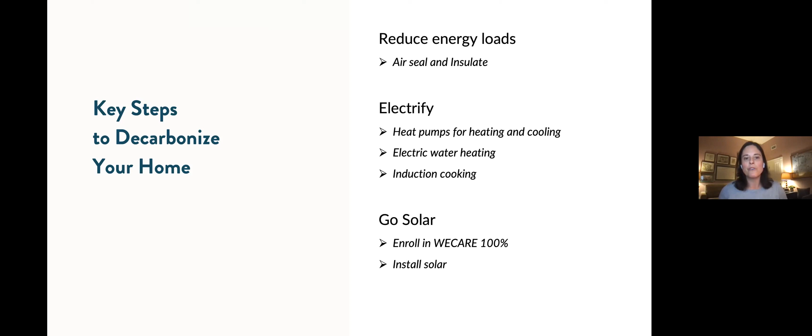That doesn't necessarily need to happen in sequence, particularly if you're signing up for renewable energy through the municipal light plant. So I'd like to move on now to share a couple of case studies that give you a sense of what this decarbonization roadmap might look like in practice.

I'm going to start with a project we did in Newton, a whole house retrofit in 2018. This project, unlike most of our projects and the other two I'll share after this, combined renovation work—design, space planning, reconfiguration—with energy and performance work. But this is a project we call a performance-only project, which focused just on improving the energy and carbon performance of the home.

These clients came to us with the goal of reducing their energy use and carbon emissions as much as they could within reasonable budgetary constraints. So they didn't want to thicken the wall assemblies and add insulation to the outside—their house really wasn't a great candidate for that, and there were budgetary reasons too. So they worked within the existing framing of the house to do as much as they could to improve it and drive down carbon emissions.

One of the owners is an energy policy analyst and wanted to walk the talk. So, fortunately, there was a lot to be done with this house—a lot of improvement that could be made.

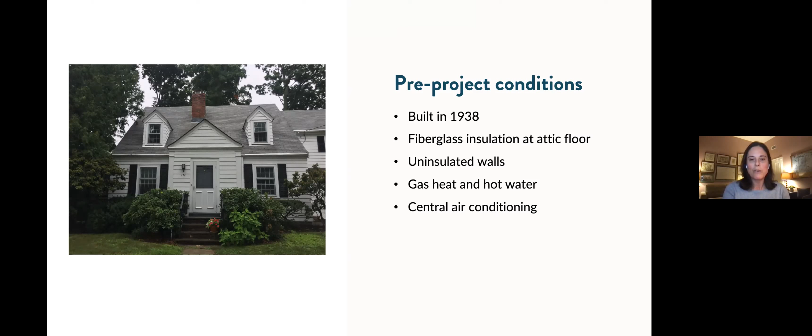The walls were uninsulated, there was no insulation in the basement, and there were modest levels of insulation along the attic floor. There was a relatively old gas system nearing the end of its useful life, so it was time to think about changing it out anyway—which is often one thing I'll say, you want to plan for that in advance of when your equipment dies, so you don't end up installing another gas system just because you're in an emergency situation.

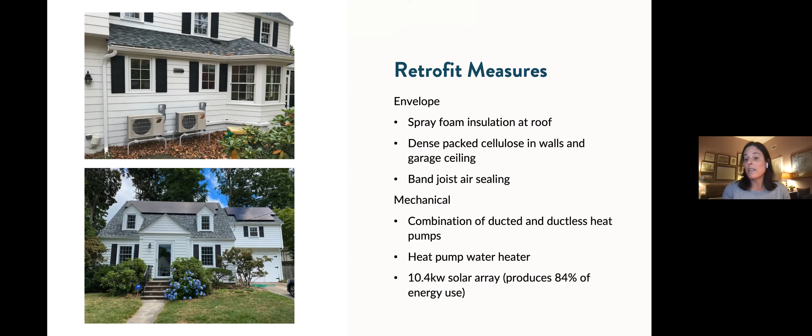So it's good to plan in advance. What we did at this house is comprehensively insulate it within the framing cavities—the underside of the roof, the walls, the garage ceiling, and air sealing around the band joists in the basement. The new mechanicals were a combination of a ducted and ductless heat pump system: ducted in the attic to serve the second floor bedrooms, and ductless on the first floor, with a heat pump water heater. Last but not least, they installed a 10.4 kW solar array, which is producing about 84% of the energy they're using now on an annual basis.

To give you a sense of the impact of this work, it's pretty dramatic—this is on the upper end of what we see with this kind of work. They went from, again, that number of the average house in New England using 125 million BTUs a year—they started off higher than that, and got dramatically lower, a 69% savings, with similarly significant savings on their operating carbon emissions.

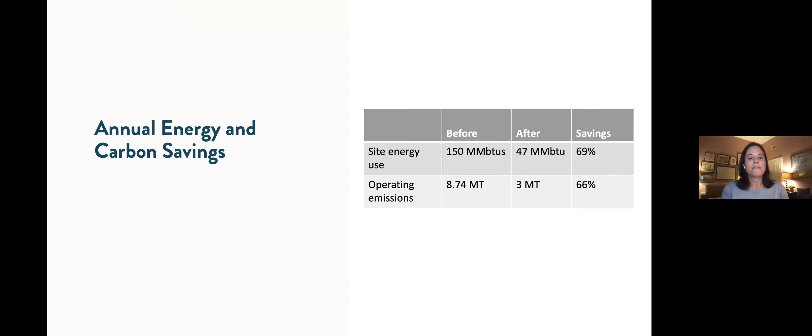The next case study I'd like to share is one of those sort of sweet spot projects for us, a combination of functional improvements, livability improvements, as well as energy performance upgrades. The owners came to us really, it was primarily about making the house livable for them.

This house had been in one of the owner's families since it was built in 1930. It was the owner's grandfather's house, his mother grew up there, and he and his wife inherited it. Very little work had been done since they moved in, so their top priorities were making the house livable, functional, and suitable for their daily lifestyle needs.

The kitchen was awkward and chopped up. There was a very public tiny bathroom plunked into the corner of the kitchen. You can't see in this picture, but they have a really deep, beautiful, private backyard that they were cut off from, with limited access to. So it was primarily about making their lives better, making this house work better for them.

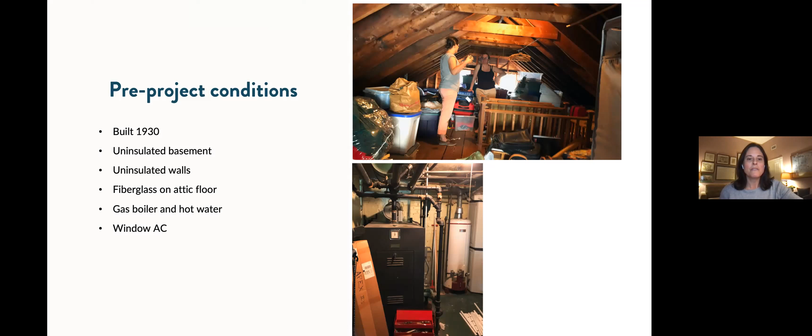So we had a lot to work with, and amenable clients who were happy to put themselves in our hands to help them become more comfortable. Top priority was to give them a bright, airy, open kitchen that connected to the rest of the house and the backyard, and just really worked for their daily needs.

We also took over the back third of the living room, a front-to-back living room, to create a first floor bathroom that would be accessible for their aging parents when they came to visit, and provide overflow use for their family. Before this, they were a family of 4 with 1.5 bathrooms. And then there's this beautiful large back deck with room for a seating area as well as dining.

And then the energy measures. Similar to the last project, we comprehensively insulated the entire shell, eliminated the gas, went over to heat pumps for heating and cooling, as well as a heat pump water heater, and changed over the cooking to induction. Actually, the last remaining gas appliance in the house is the gas dryer, which was fairly new, so they still have a small gas bill every month.

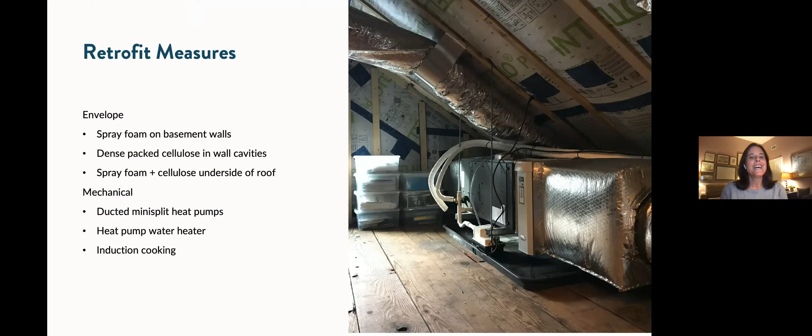But the end result of this work was even more dramatic. I want to emphasize, you'll see in the next case study, that this isn't what we see on every project - this is a home that needed a lot. There are a lot of homes out there that really haven't yet been insulated, with really old equipment. When you encounter those homes, it's possible to achieve really deep energy savings and deep decarbonization, and that's without what we'd think of as super insulating or doing a deep energy retrofit where you're adding insulation to the outside of the walls and on top of the roof.

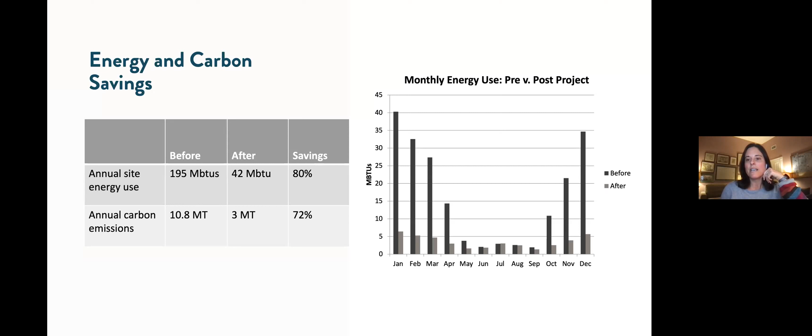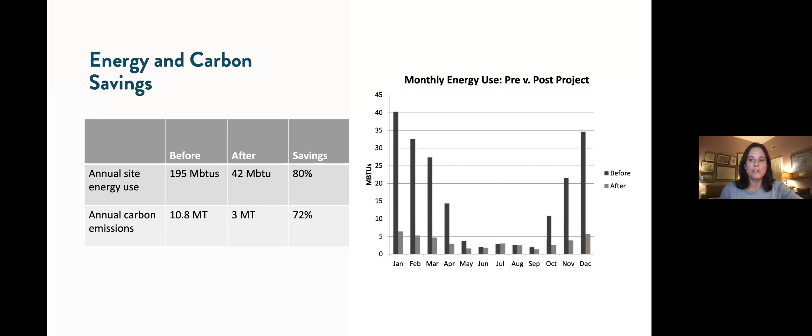You can see the dramatic drops in energy use in the colder months of the year through this combination of comprehensively insulating the building shell and then changing out really old, inefficient equipment for best-in-class heat pumps. All right, final project.

Now you'll get to see what more modest or moderate improvements look like, which is really more typical for our projects than these dramatic savings we're able to achieve. We are very often, when working with existing homes, pushed back against hard in our efforts to achieve deep levels of decarbonization.

If you don't have easy access to the exterior surfaces to insulate them, let's say the house is a brick house and insulating the walls would require dense-packing cellulose from the inside, which is really messy and invasive, and you kind of need to move out of your entire house. You can run into situations like that all the time with existing homes where it's just really hard. And this was one of those cases.

This project, like all of our projects, was interesting. This was another really interesting family. Three generations are living in this home. The owners have 3 school-age children, and both of their parents live with them. The owners have their bedroom on the 3rd floor, their bedroom and bath, and the 2nd floor primary suite. The parents and the 3 kids - I believe they have 4 bedrooms on the 2nd floor - so their sleeping quarters all work for them for the 7-person family.

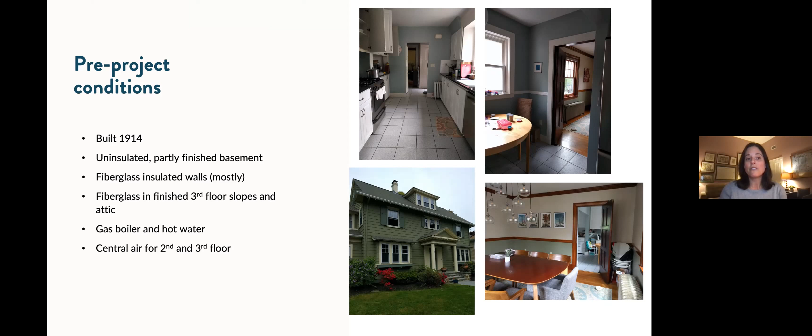They had a gas boiler and hot water heater and central air for the second and third floor. What we were able to accomplish, as you see on this slide, is all the walls that we opened up - about a third of the first floor area - we insulated well, and then we incorporated heat pumps into the first floor. So we took the first floor off of the gas boiler and put in heat pumps for heating and cooling there.

They've retained the gas boiler and central air, with the idea that when the time comes to change one or both of those out, they'll complete the conversion to heat pumps and also change the water heater at the same time. You can see in this top photo, taken right during punch list, we did retain a gas range.

We've been pushing our clients pretty hard on cooking, and I'd say we're successful two-thirds of the time. A lot of people come to us wanting induction cooking, so we don't have to sell them on it, but some people really do not want it - and this was one of those cases. They were convinced their style of cooking was not compatible with induction cooking. When that happens, we say, okay, we're the recommenders, you're the deciders. But that seems to be the sticking point for electrification more than, I'd say, heat pumps.

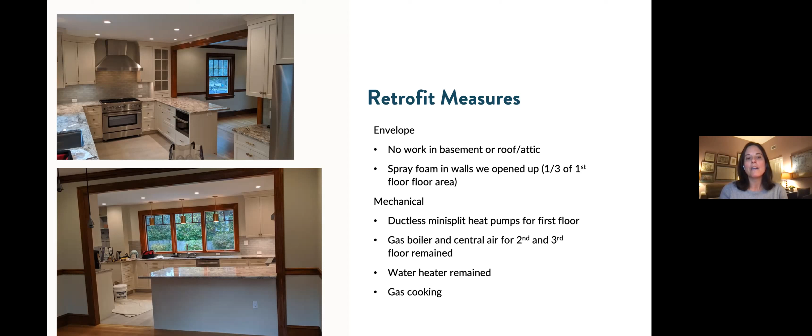More modest savings on this house, but still significant: 21% savings on annual energy use, 16% on carbon. Not surprisingly, another bar chart shows electric use increased at this house because we did a partial conversion to heat pumps, and the gas went down. Just some different ways that we look at this data.

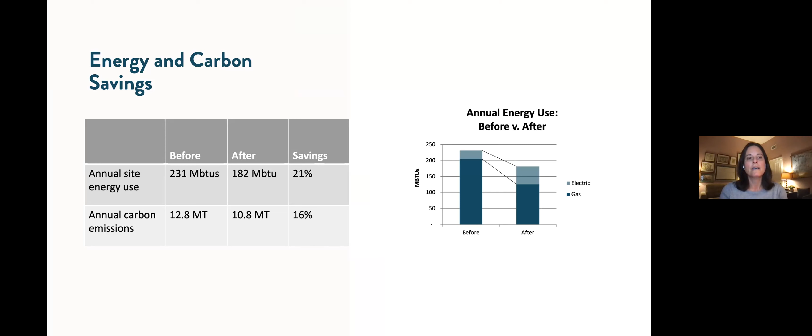All right, this is my last slide, and then I will turn it over to Stephanie. These are the three things I'd like to leave you with. First, most home renovations and home improvement projects present at least some opportunities to improve performance. They may not be dramatic, but more often than not there are some. And in many cases, deep decarbonization is possible—deeper than many people think—with the types of measures that we're doing.

The last thing I'll say is that you really do need to plan ahead. I mentioned the example earlier: if you haven't planned for your heating system replacement, and your gas boiler or furnace dies in the middle of winter, you're going to replace it with exactly what you have because you need it in as soon as possible so you don't freeze. But if you plan ahead, you have the time, you know what you're going to do when your heating system dies, and you have a plan to make that happen. So plan ahead, because if you miss an opportunity like your next heating system, it's going to be a couple of decades before it makes sense to consider that again.

So I will. Thank you, Rachel. Stop there, and I don't know if you want to go on. I'll give Stephanie a chance to get ready. Thank you, that was really good. I'm just going to throw one question at you, okay Rachel, and then we can do the rest later.

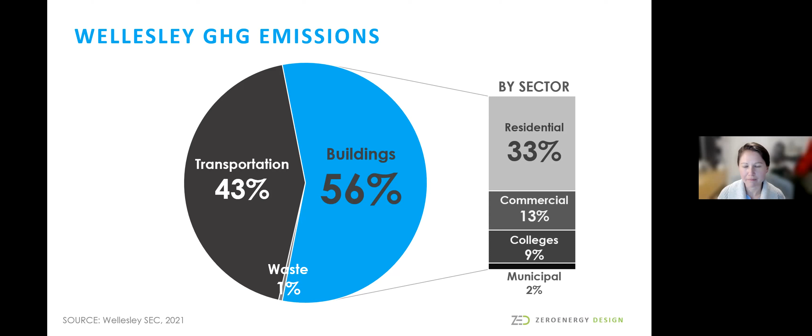So where does our energy go? Rachel had, I think, cited some of these statistics. We may have been looking at different years, but greenhouse gas emissions in Wellesley.

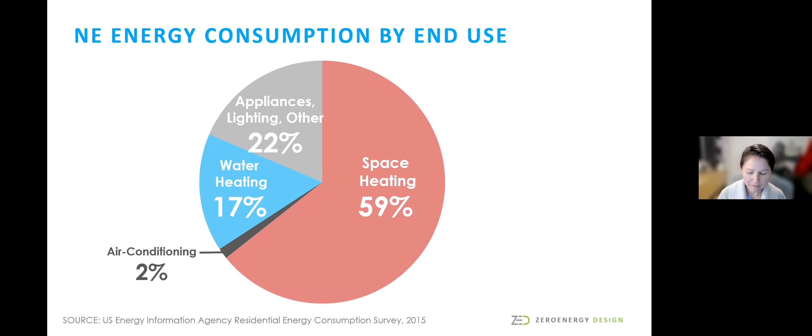Homes are a large part of the problem and also part of the solution looking forward. Rachel talked about the heating demand of a home. If we look at New England energy consumption, the majority of it goes to space heating. So where is this heat going? It's going literally through cracks, whether in a new home or an existing one, like Rachel was talking about. We're losing heat through our walls and roofs, the opaque surfaces, through our windows, and even through the ground, through our foundations and basements.

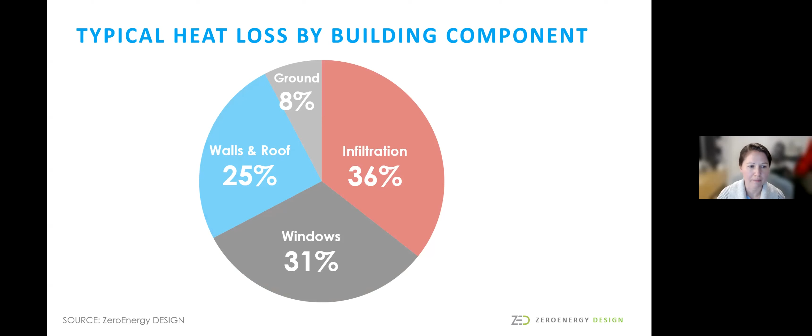So we're really looking to change the conversation about design. It's not just about what our homes look and feel like, but also how they perform and the impact that they have on the environment. So on our website, for example, we disclose energy use intensity, or EUI, of our projects.

EUI expresses a building's energy use as a function of its size. It's calculated by dividing the total energy consumed by the building in one year, measured in kBTUs, by the total floor area, measured in square feet. So if it's zero, that might be a net zero building or a net zero home, producing as much energy as it uses. And if it's negative, it means it's net positive, producing more energy than it uses.

And that's really important when we start to think about charging electric vehicles. So Rachel covered the real challenge, the renovations. Each one is unique, and they can be complicated, but new construction is the low-hanging fruit. It's easy to do these things right from the start when you have a blank slate.

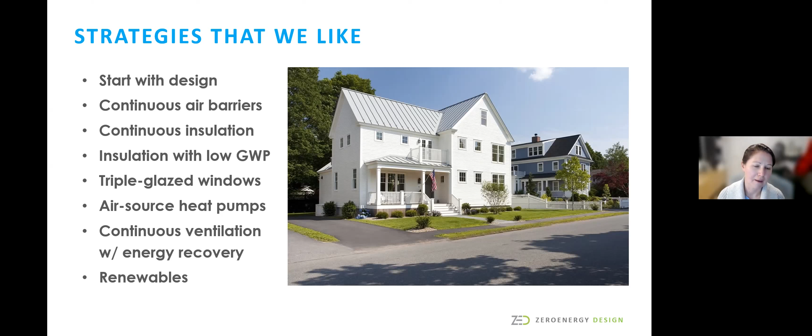I'm going to walk through what this might look like using two different case studies, but here are the strategies we like. Start with design, employ a continuous air barrier and continuous insulation. We like to prioritize materials, specifically insulation with low global warming potential, or GWP. We like triple glazed windows in new construction, air source heat pumps, continuous ventilation with energy recovery, and renewables. So this is the playbook, and it really works on almost all of the new construction projects that we work on.

So here's a project in Wellesley that we worked on a couple of years ago. We started with a design that responded to the site conditions. The back of the property, so the rear faces south.

We've also looked to right size the home so that it meets the needs of the homeowner.

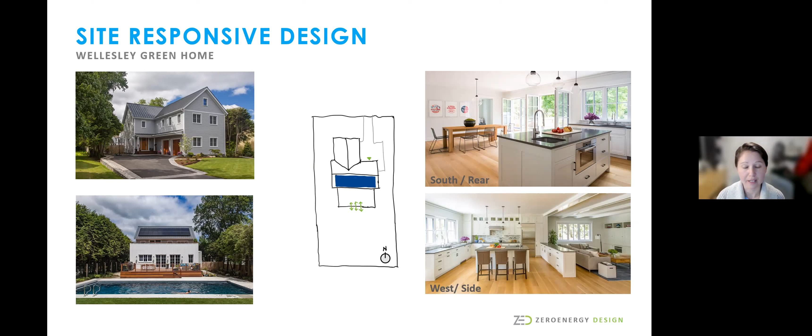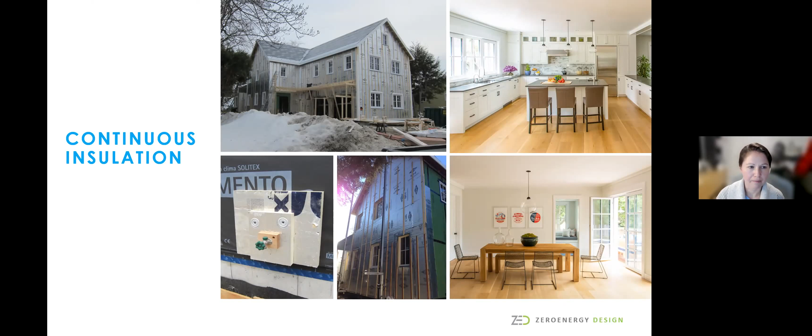It's locally available, and it's really effective at creating an airtight enclosure. After we address the air leakage, we really want to give the home a winter coat. So like all good New Englanders, we wrap the house, the wood structure, in continuous insulation, and it's really effective at cutting down heat loss through the walls, through the roof, and even through the foundation. You're seeing that green zip sheathing get covered up with insulation, and eventually the siding will get applied on top of that.

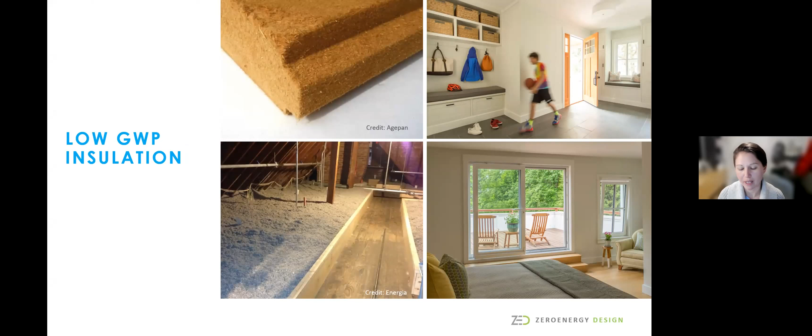When we look at the materials, materials matter. We look to specify non-toxic, low embodied carbon materials. We like to use a lot of cellulose in walls and roofs, and we use insulation that is, again, readily available. Sometimes we do use products that are currently being imported, but are looking forward to being able to source them locally in the future.

Triple glazed windows, I think this was a question that had come up earlier. We use them pretty exclusively in new construction, and even in some of our renovation projects. But they're really much more comfortable to be able to sit in front of, and not feel cold and drafty in the winter.

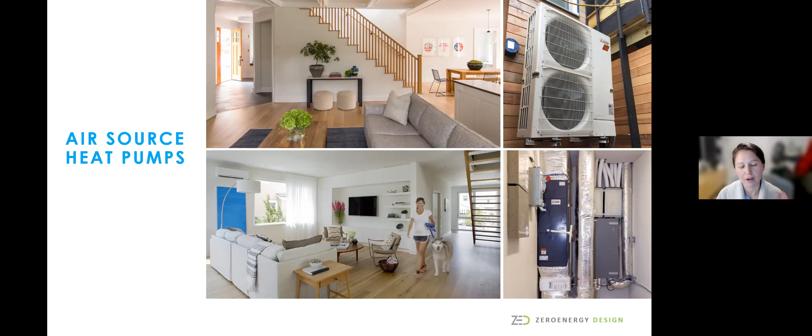Again, Rachel talked about air source heat pumps. It's kind of like an air conditioner that works in two directions. They're rated for very low temperatures, so we don't have a problem using them in this climate as a primary heat source. They're really well sized for the very low heating load that we have in the homes that we design.

Once we make the structure airtight, it's important to provide continuous ventilation. The system called an energy recovery ventilator, or ERV, supplies fresh air to the living space and exhausts it from sources of contamination like kitchens and bathrooms. The ERV exchanges heat and moisture between the incoming and outgoing air streams.

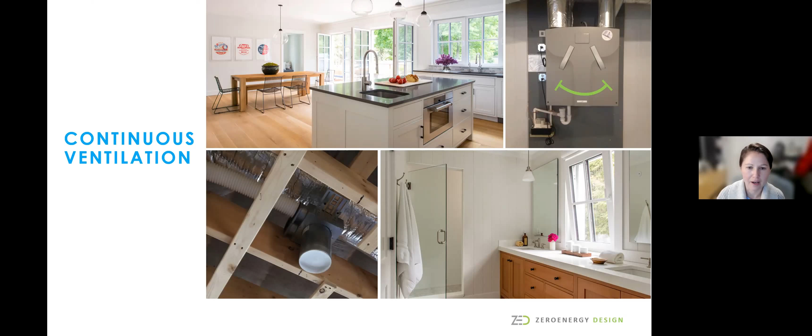So finally, we've really reduced the load of the home. We've reduced the heating and cooling energy. Hopefully we have an efficient user, efficient systems, Energy Star appliances, induction cooking, and that allows us to offset a lot of the home's energy use with a rooftop solar array. Some really simple planning can create a great south-facing roof surface that is uninterrupted by plumbing vents and other things that can get in the way in an existing home.

This is another project in Lincoln that I'll run through a bit more quickly. But again, a lot of the same. So site responsive design, in this case the front of the house faces south, and they had the flexibility to push the home a little bit farther away from the street to create a nice green space that they wanted to look out onto.

So we located the kitchen, dining, and living spaces on the south side to really take advantage of that generously glazed, warm, southern facade of the home. We've located programs that maybe don't need as much light, don't really benefit from as many windows, on the northern side of the home, while still creating a connection to the backyard. So again, we're starting the process by thinking about design and really right-sizing the house for the homeowner's needs.

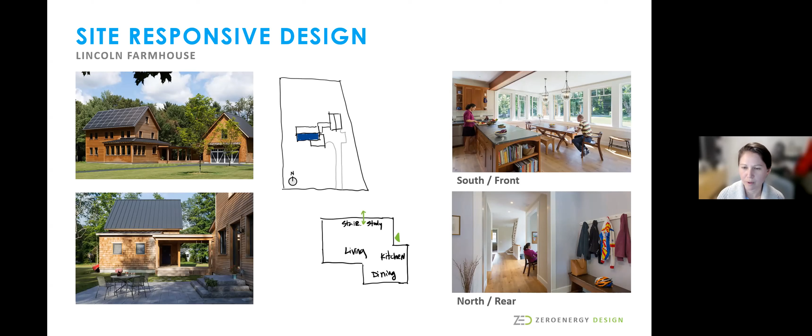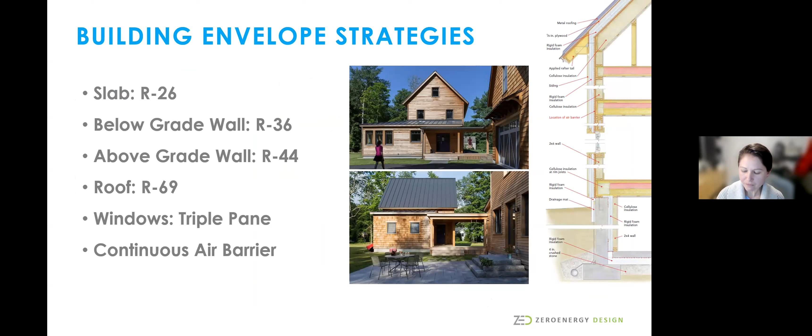Here, showing some of the specs that we're using, and a technical drawing that's cutting through the assembly, quite similar to the one that I just showed in Wellesley, with some of the performance values here. And again, a really similar approach to the enclosure and the systems.

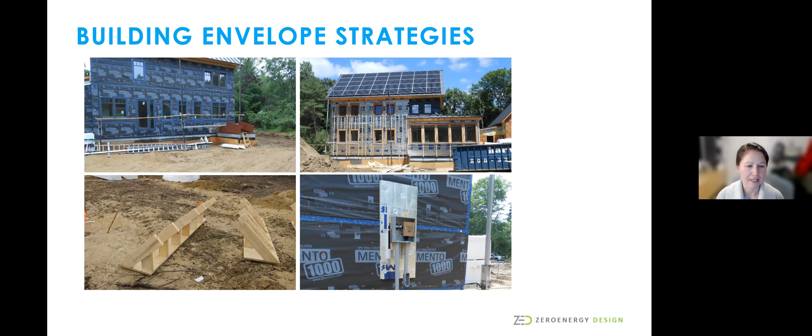Here we are using a different type of weather and air barrier over the sheathing that gets installed over plywood, as opposed to the 2-in-1 product. But again, using that same continuous insulation,

and then focusing on the systems, the air source heat pumps for heating and cooling. As Rachel mentioned, we use a lot of heat pump hot water heaters for domestic hot water. And again, the energy recovery ventilator provides continuous ventilation to the home, whether or not the windows are open or closed. It's a really low energy use system

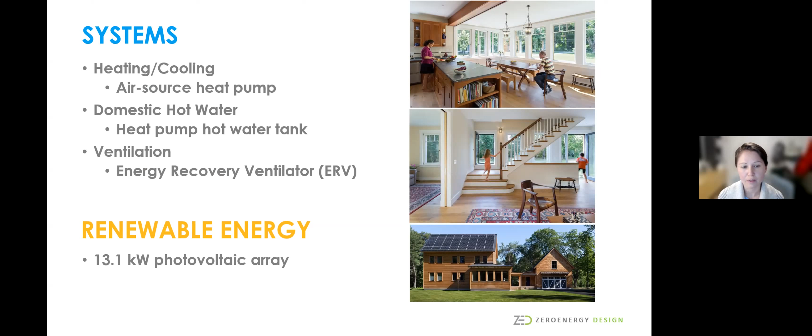that is a great fit for a super insulated home. This one has a 13.1 kW array. Again, we thought about that when we designed the roof form. We put all of the plumbing vents on the rear of the home so that they didn't interrupt the solar array.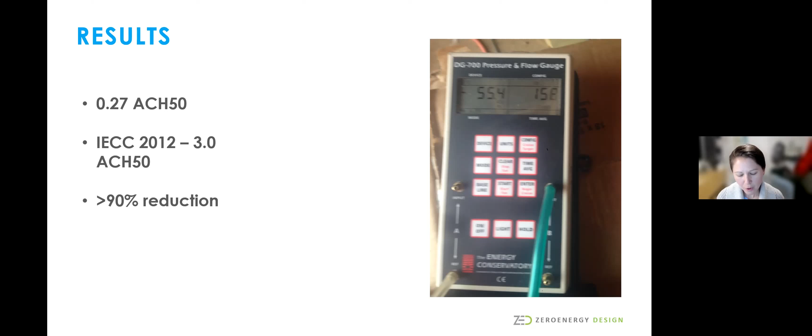And we test the house throughout construction, as well as at the end, to help ensure success, to make sure that we're hitting our airtightness goals. So this project is extremely airtight relative to what the code requires. And it just helps ensure that the home kind of works as designed.

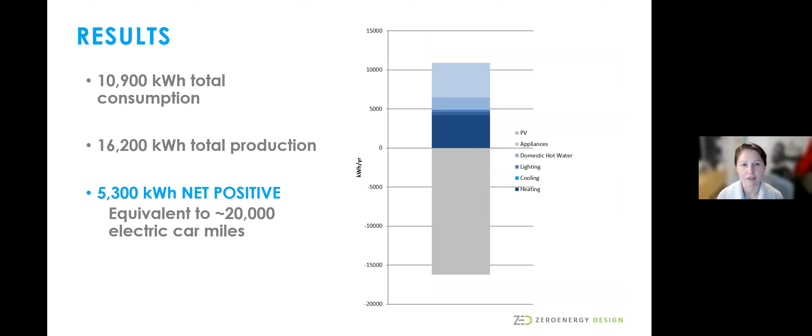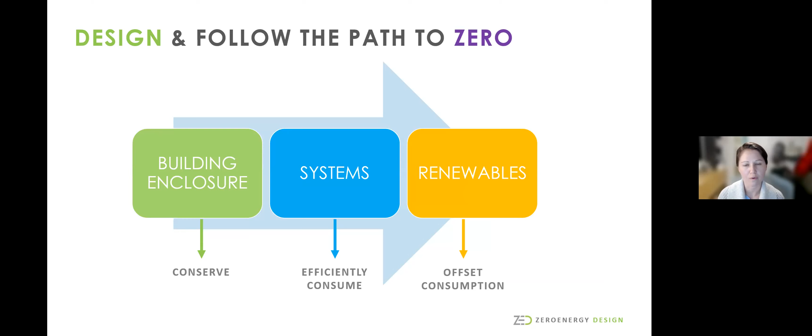So, again, the message is that this approach is achievable now. Each home that's built is either part of the problem or part of the solution. So please ask, really demand something different. Net zero, net positive, they're all really great targets that are implementable and achievable now. Thank you.

Thank you, Stephanie. I like that slogan, follow the path to zero. We have so many questions. I think I'm just going to wait. So I'm just going to tell Nick he can start his slides if he's ready.